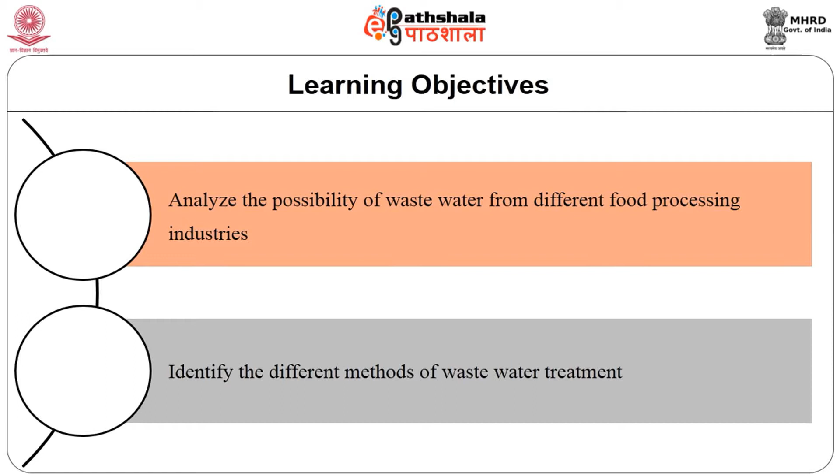Do you know the sources of wastewater? Let us see. Wastewater from food processing industry is different from other non-food industries in being readily degradable and free from toxicity.

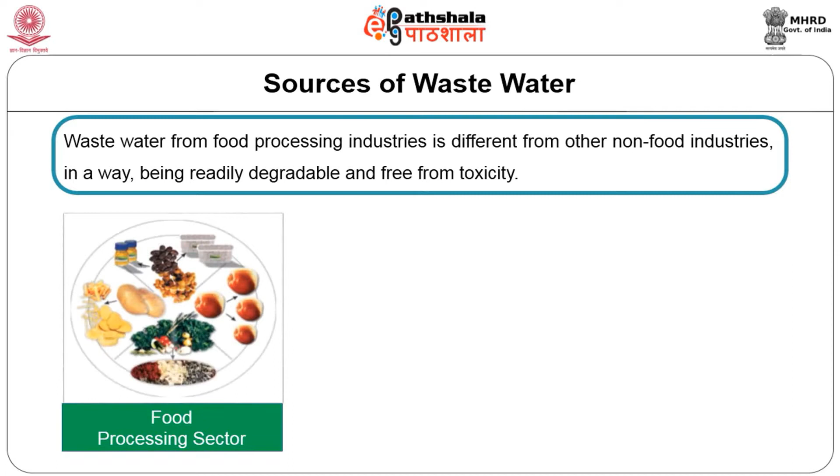Food processing sector can be classified into four major groups: fruit and vegetables, meat, poultry and seafood, beverage and bottling, and dairy operations. The sources of wastewater may be from meat and poultry processing, beverage industries, fruit and vegetable processing, dairy processing, fish processing, corn milling, fats and oils, sugar and flavor industry.

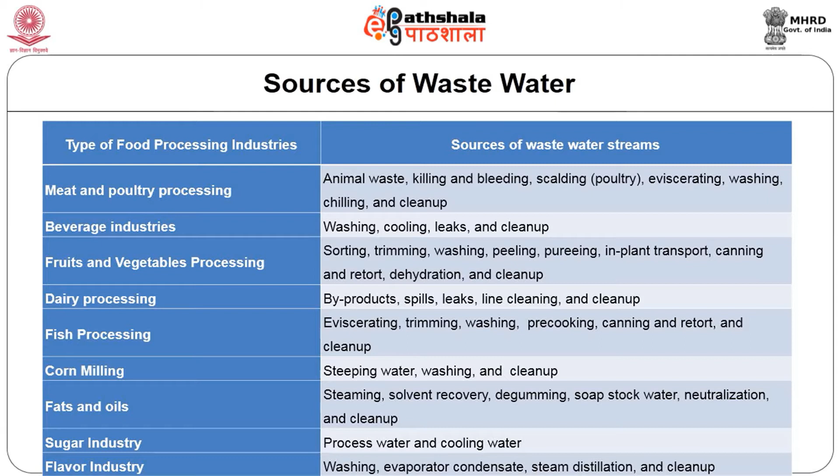The food processing wastewater shows a huge variation in BOD and COD level, total and suspended solids, oil, starch, sugar, color, preservatives, salts and minerals. This is due to the usage of different additives used for different food products.

Food industry wastewater constitutes COD, BOD and suspended solids of 11,220 mg per liter, 6,860 mg per liter and 2,210 mg per liter respectively. It is also reported that food industry wastewater is easily amenable to physicochemical treatment.

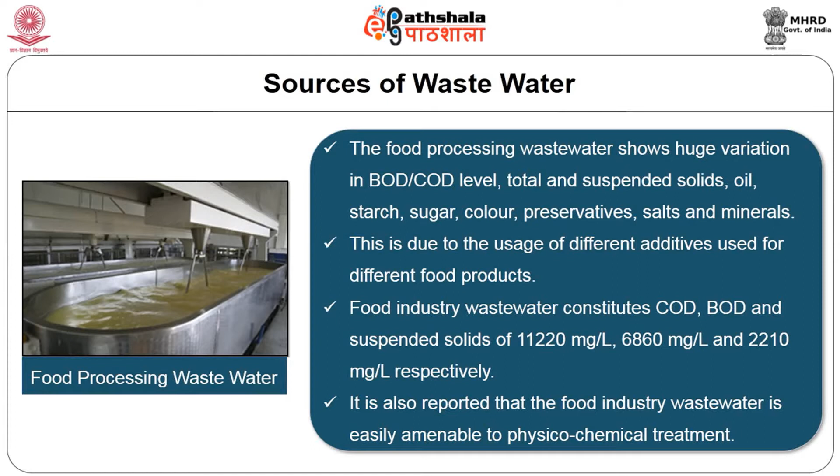The treatment methods can be used individually or in combination to remove moderate to high degree of chemical oxygen demand, biochemical oxygen demand, and suspended solids from the food processing wastewater.

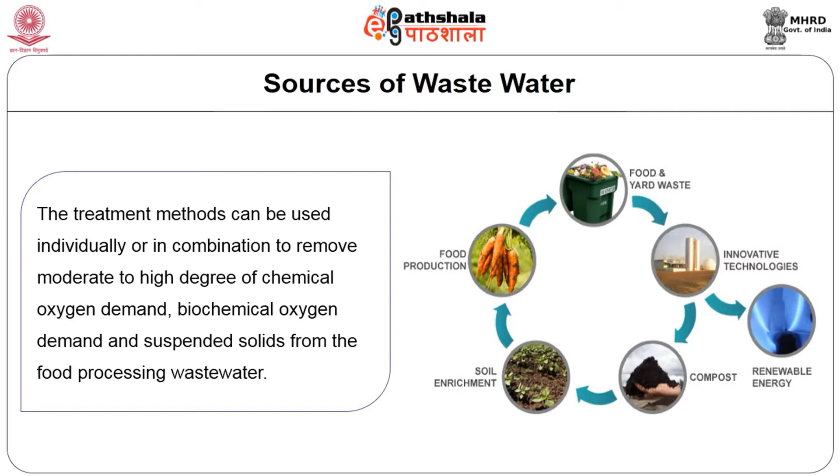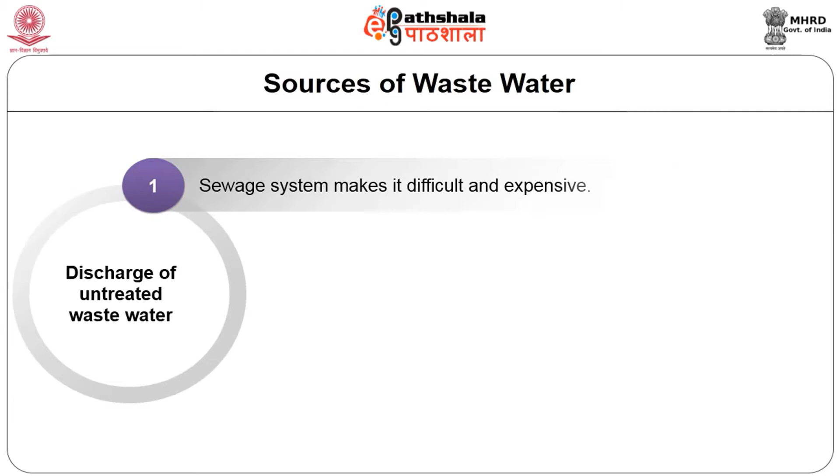Discharge of untreated wastewater into the sewage system makes it difficult and expensive. Similarly, discharging untreated water directly into the environment leads to numerous health hazards to humans, animals and marine organisms. Hence, the wastewater needs to be treated before discharging.

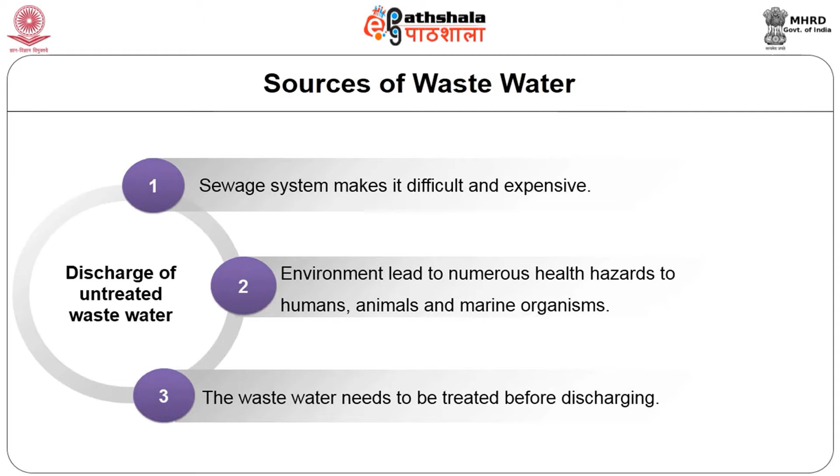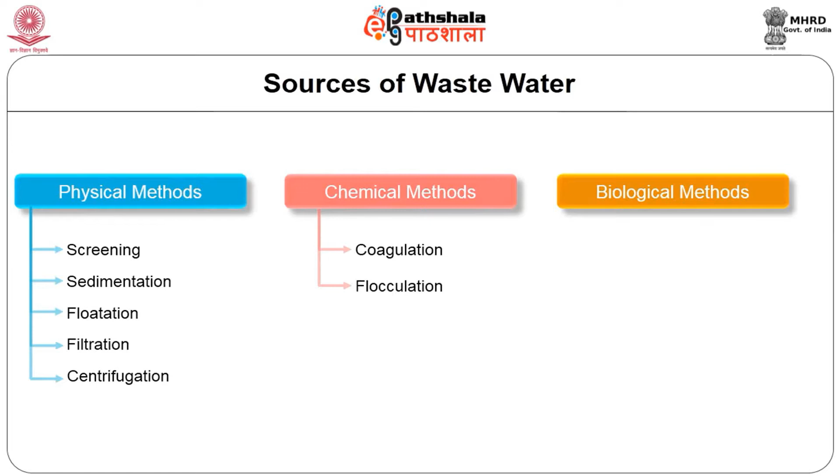The wastewater treatment methods are broadly classified into physical, chemical and biological methods. The physical methods include screening, sedimentation, flotation, filtration and centrifugation, whereas the chemical methods include coagulation and flocculation. First, we will discuss the physical methods of treatment, starting with screening.

Screening is the first process carried out in wastewater treatment. The presence of large solids would interfere with the next process or damage the equipment. A screen is a device with uniform size openings used to retain solids found in the wastewater entering the treatment plant. The screens may be of three different sizes: coarse screens, 6 to 150 mm; fine screen, 1.5 to 6 mm; and very fine screen, 0.2 to 1.5 mm.

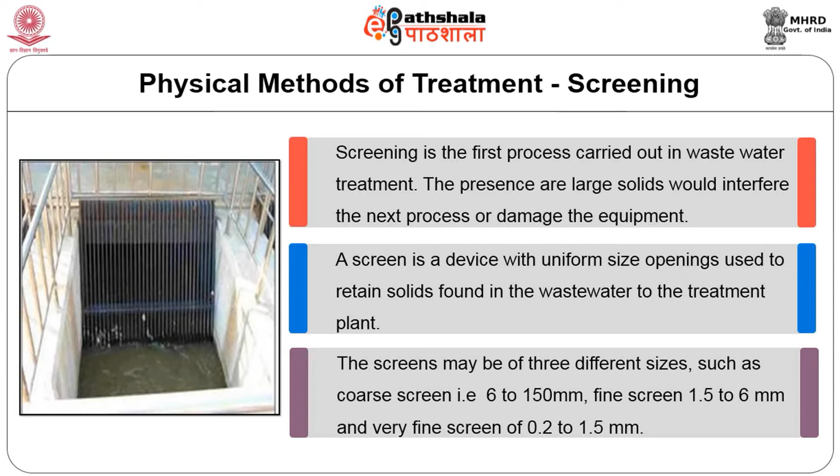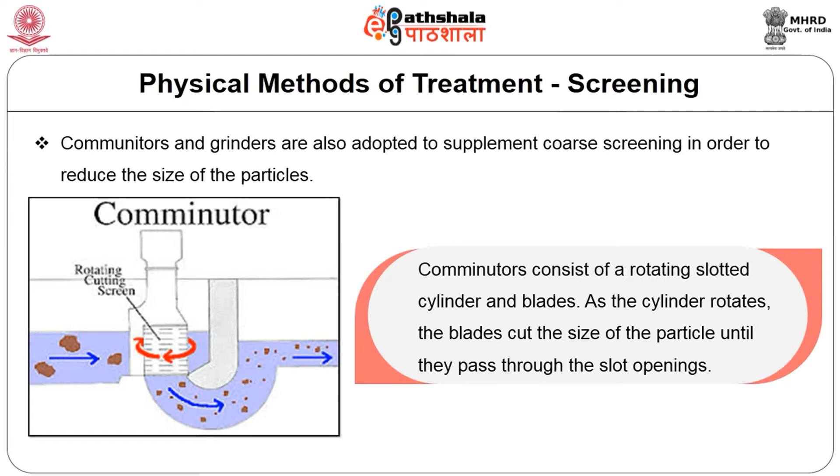Comminutors and grinders are also adopted to supplement coarse screening in order to reduce the size of particles. Comminutors consist of a rotating slotted cylinder and blades. As the cylinder rotates, the blade cuts the size of particles until they pass through the slot openings. Grinders consist of two sets of counter-rotating intermeshing cutters that trap and shear solids in the wastewater into a reliable particle size of 6 mm. The shafts counter-rotate at different speeds to clean the cutters.

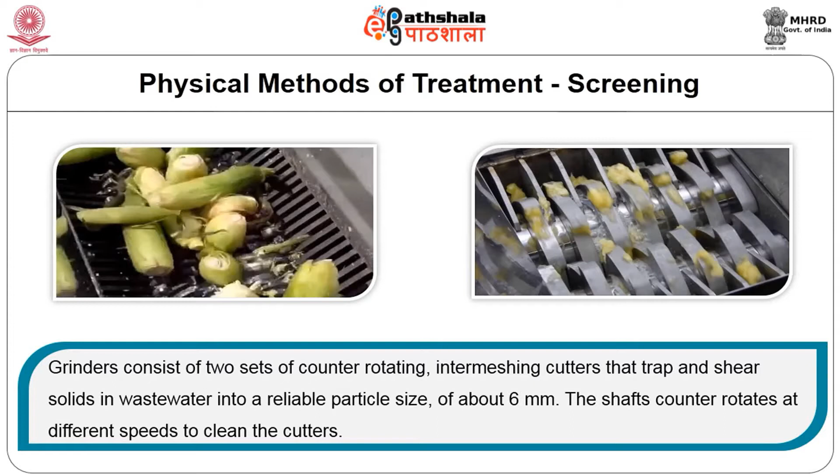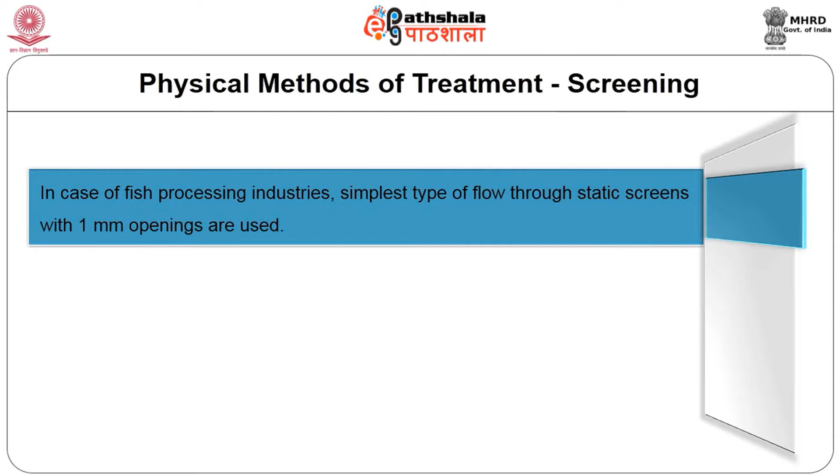In case of fish processing industry, the simplest type of flow-through static screens with 1 mm openings are used. The tangential type screens are static type but less prone to clogging during the flow of wastewater. Screening is used more frequently in small scale fish processing plants together with very simple settling tanks.

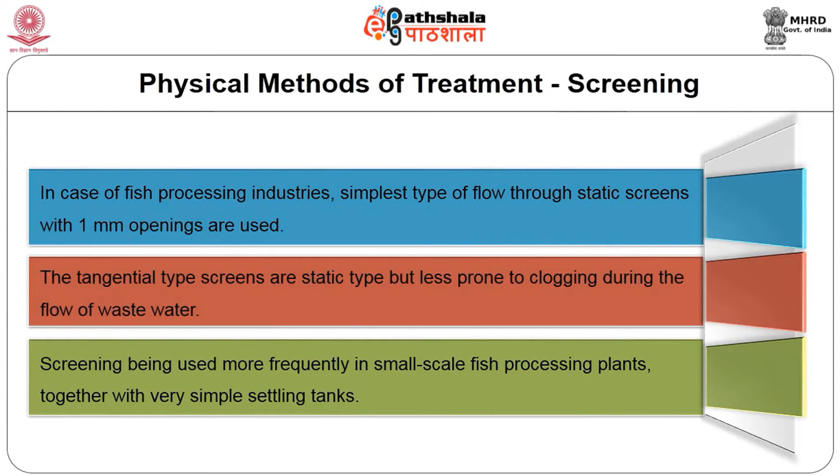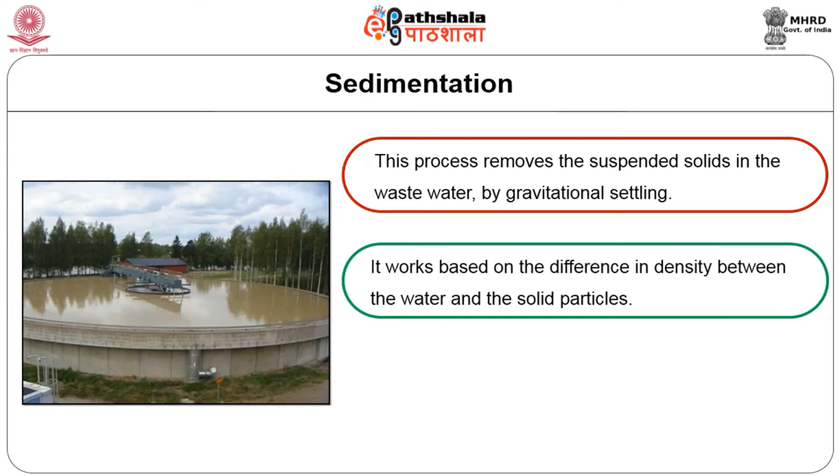The next method is sedimentation. This process removes suspended solids in the wastewater by gravitational settling. It works based on the difference in density between the water and the solid particles. The solid particles tend to settle at the bottom due to their higher density than water. Sometimes the terms sedimentation and settling are used interchangeably.

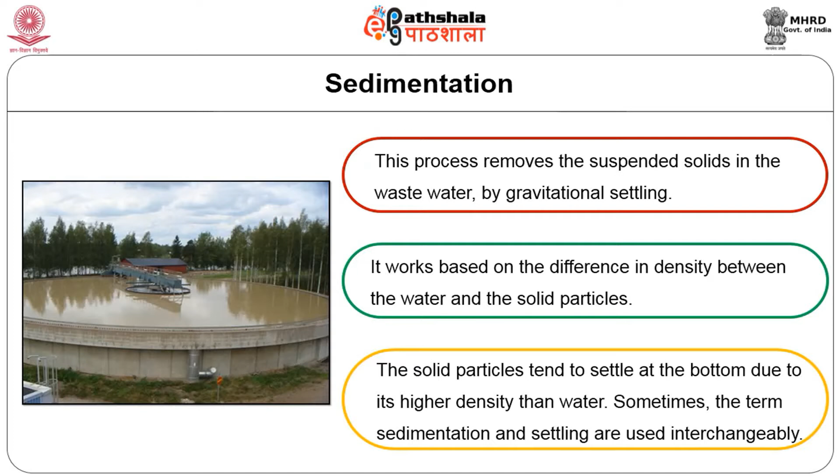Sedimentation process can be used as both primary and secondary treatment for separation of solids generated during biological treatment such as activated sludge or trickling filters. To carry out the gravitational settling, sedimentation basins are constructed in different sizes and shapes as required.

The basin consists of 4 zones: the inlet zone, settling zone, sludge zone and outlet zone. The incoming wastewater is distributed uniformly throughout the inlet zone to the tank. The heavier particles tend to settle in the settling zone and collect in the sludge zone at the bottom of the tank. The water without solids is collected in the outlet zone.

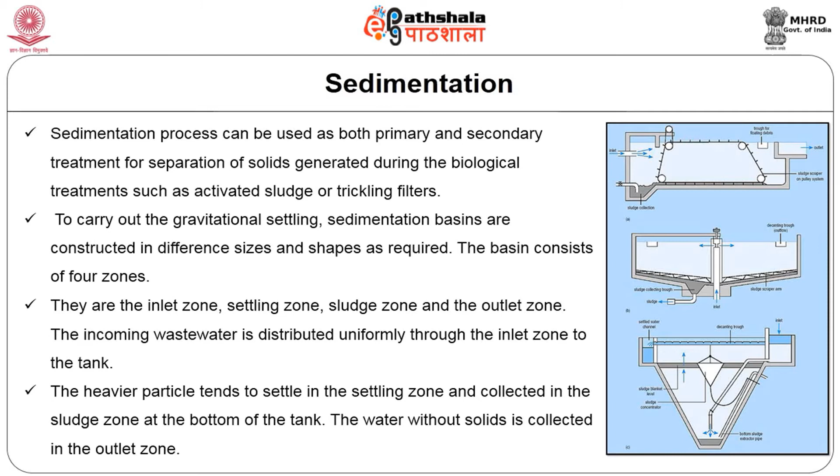Next topic is flotation. Flotation is a unit operation that removes suspended solids from the liquid phase. The most common method is air flotation, which may be further classified as dissolved air flotation and dispersed air flotation.

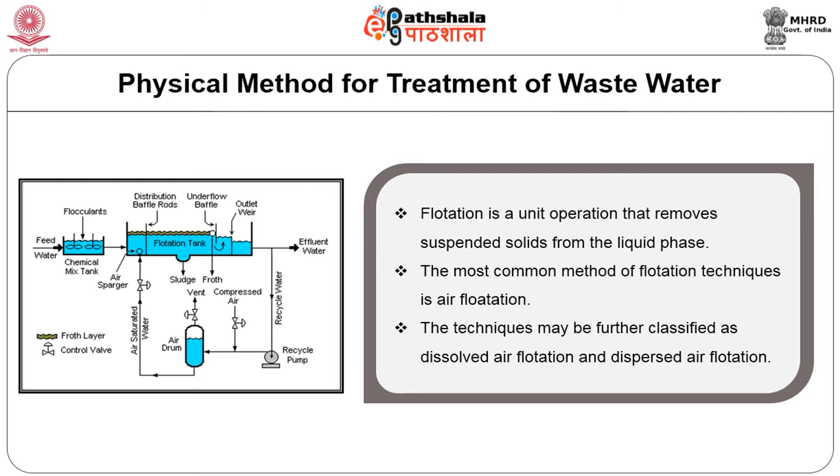In dissolved air flotation, the wastewater is initially pressurized with air in a closed tank. After passing through a pressure reduction valve, it enters the flotation tank, where due to sudden reduction in pressure, minute air bubbles of around 50 to 100 microns in diameter are produced. The bubbles attach to the suspended particles, and the buoyant force is great enough to rise to the surface, forming a scum layer.

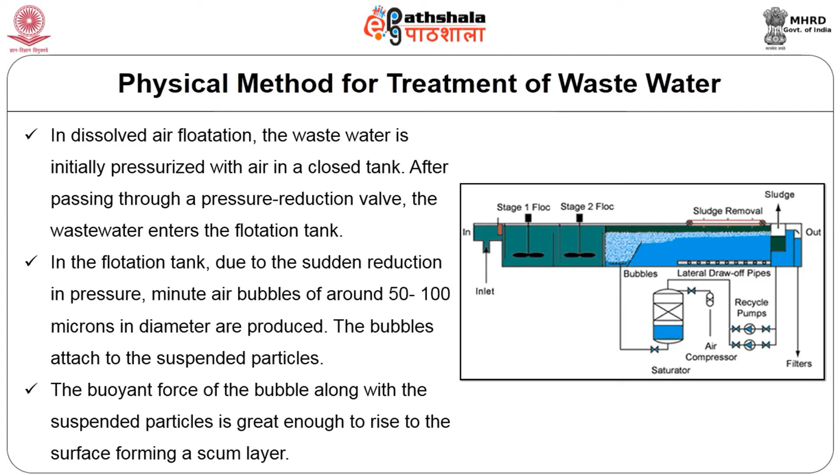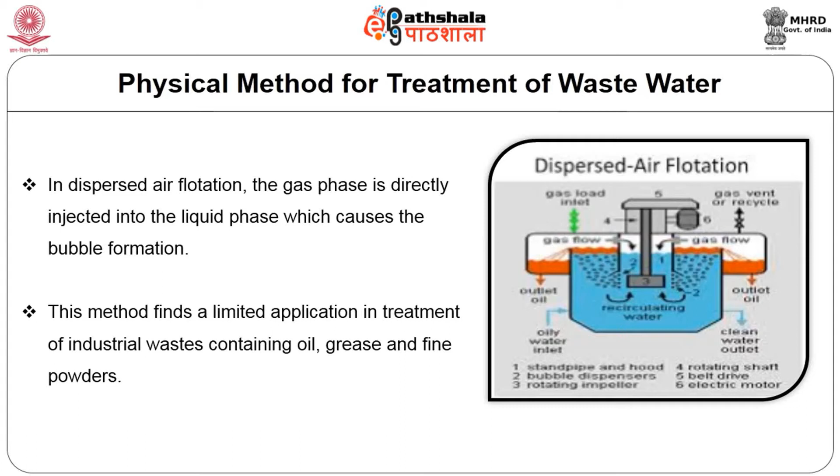In dispersed air flotation, the gas is directly injected into the liquid phase, causing bubble formation. This method finds limited application in treatment of industrial waste containing oil, grease and fine powders. The performance of these methods can be enhanced by addition of chemical additives.

The advantage of flotation over sedimentation is that very small and light particles that settle slowly can also be removed more completely in a shorter period. Flotation can also be used to concentrate sludge obtained from biological process.

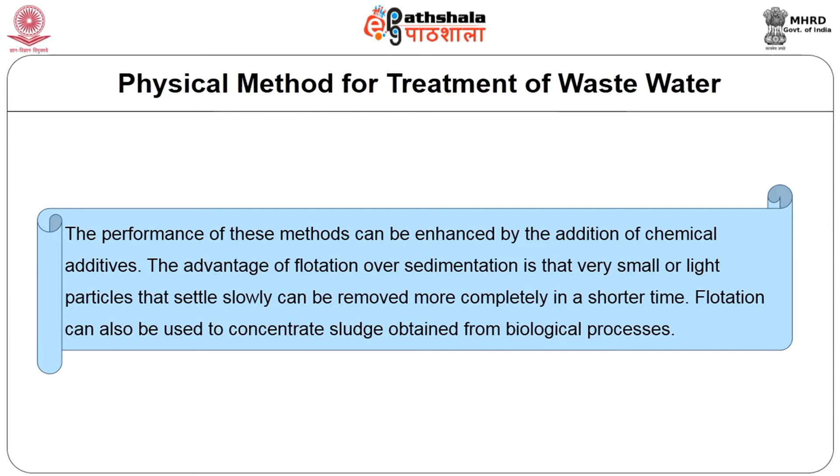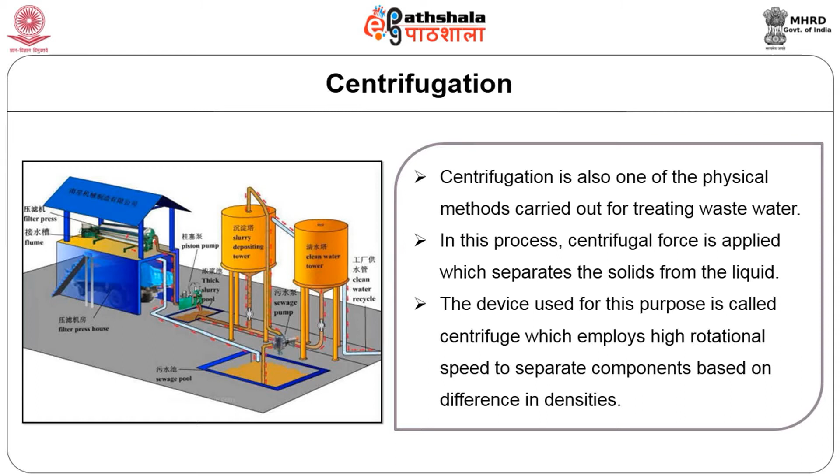The next method is centrifugation, one of the physical methods carried out for treating wastewater. In this process, centrifugal force is applied which separates the solids from the liquid. The device used is called a centrifuge, which employs high rotational speed to separate components based on difference in densities. A decanter centrifuge plays an important role in wastewater treatment, especially in food processing industries, separating solid material from liquids.

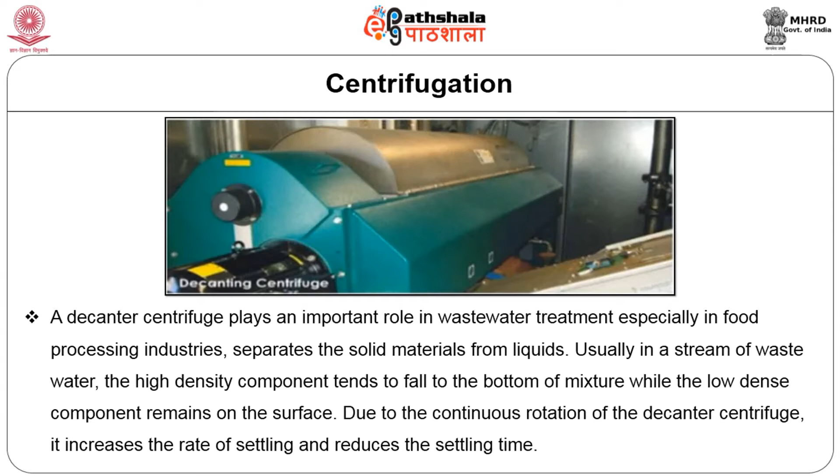Usually, in a stream of wastewater, the high density component tends to fall to the bottom of the mixture while the low dense component remains on the surface. Due to continuous rotation of the decanter centrifuge, it increases the rate of settling and reduces the settling time.

Another well-known method is filtration, often employed in wastewater treatment with or without pre-treatments by coagulation, flocculation and sedimentation, for removal of flocs or solids remaining in effluents from primary and secondary wastewater treatment. Use of rotary vacuum filters for dewatering is the most common method of filtration of sludge.

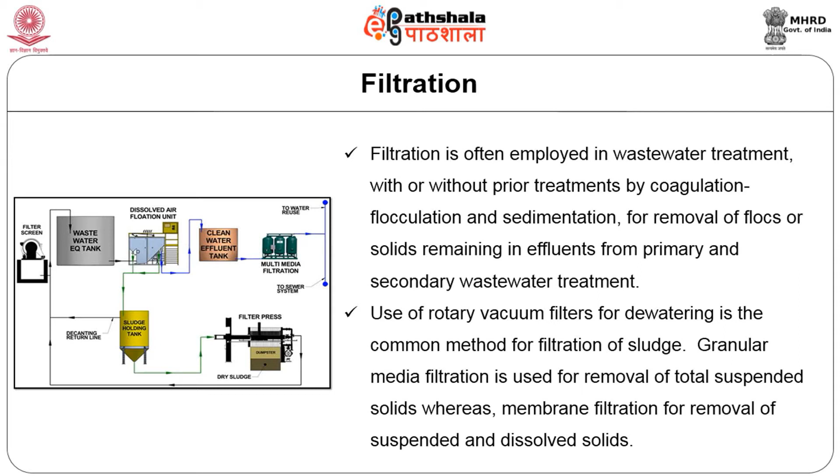Granular media filtration is used for removal of total suspended solids, whereas membrane filtration is used for removal of suspended and dissolved solids.

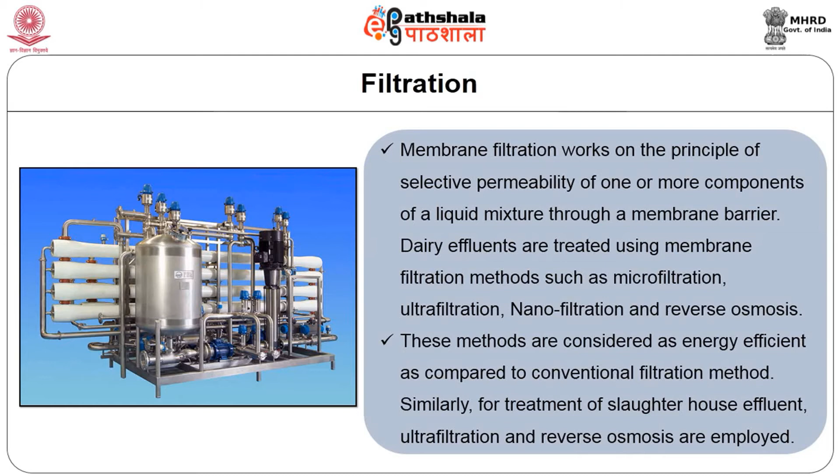Membrane filtration works on the principle of selective permeability of one or more components of a liquid mixture through a membrane barrier. Dairy effluents are treated using membrane filtration methods such as microfiltration, ultrafiltration, nanofiltration and reverse osmosis. These methods are considered energy efficient compared to conventional filtration methods. Similarly, for treatment of slaughterhouse effluent, ultrafiltration and reverse osmosis are employed.

Next, we'll move on to chemical methods. Chemical methods of wastewater treatment involve chemicals which will react with a portion of the undesired materials. But the use of chemical additives creates difficulty in discharging huge amounts of treated chemicals.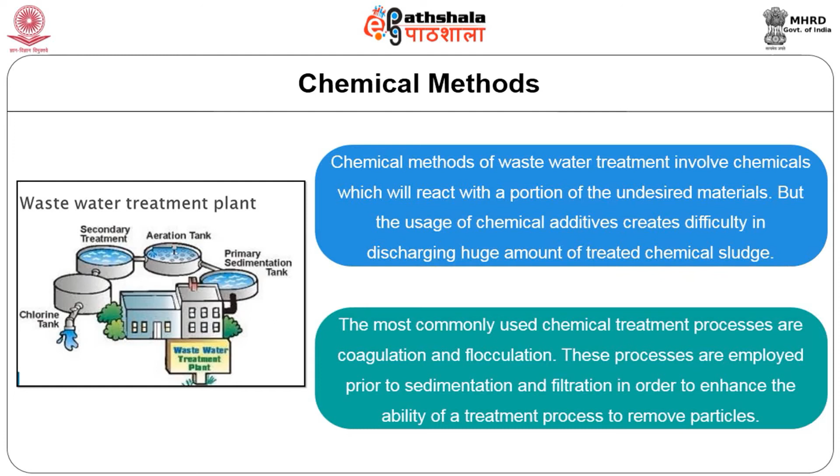The most commonly used chemical treatment processes are coagulation and flocculation. These processes are employed prior to sedimentation and filtration in order to enhance the ability of a treatment process to remove particles. So the next method is coagulation.

Coagulation is a process by which colloidal particles are destabilized. Destabilization can be achieved through the addition of coagulants. It neutralizes the charges of wastewater and forms a gelatinous mass to trap particles, thus forming a mass large enough to settle or to be trapped in the filter.

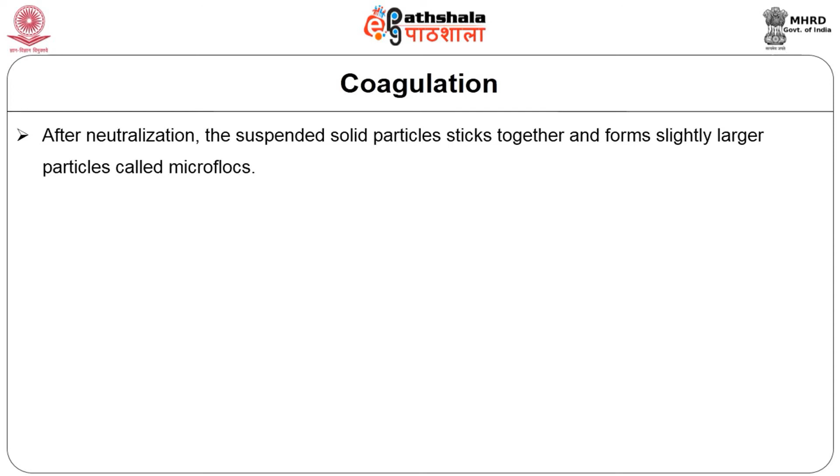Coagulants with opposite charges to those of the suspended solids are added to the water to neutralize the negative charge on dispersed non-settlable solids such as organic substances. After neutralization, the suspended solid particles stick together and form slightly larger particles called microflocs.

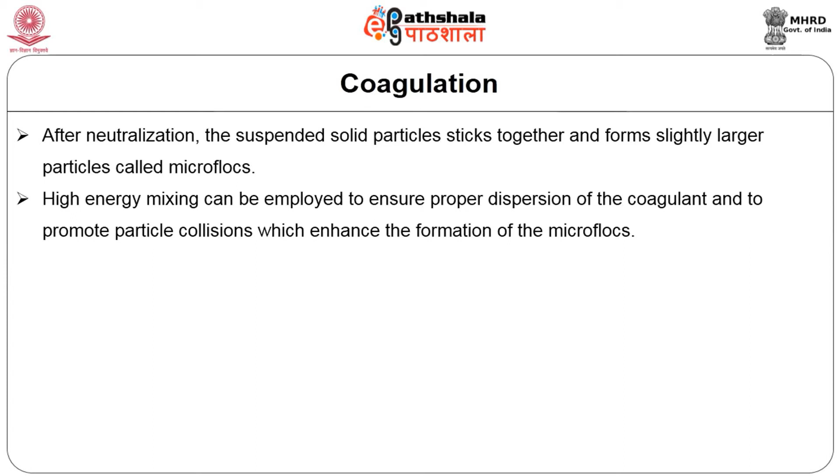High energy mixing can be employed to ensure proper dispersion of the coagulant and to promote particle collision, which enhances the formation of microflocs. The formed microflocs are then removed using the sedimentation process.

The most widely used coagulants for wastewater treatment are aluminum sulfate, ferrous sulfate, ferric sulfate, and ferric chloride. Chitosan is a natural coagulant used to treat wastewater from milk processing plants.

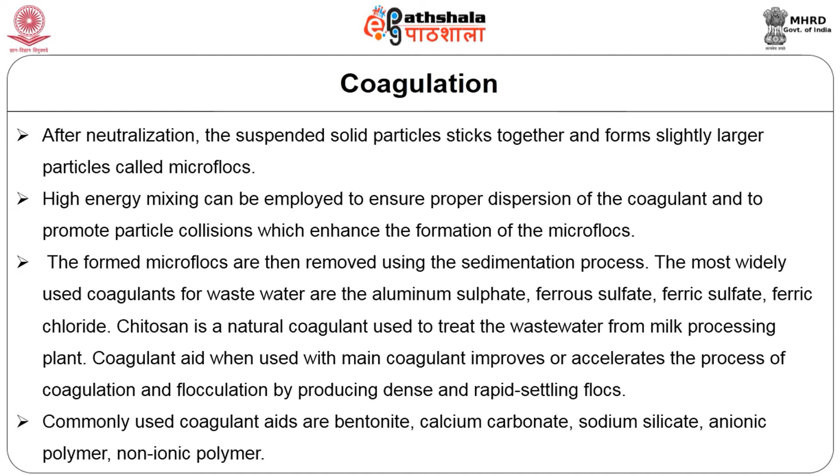Coagulant aid, when used with the main coagulant, improves or accelerates the process of coagulation and flocculation by producing a dense and rapid settling flocs. Commonly used coagulant aids are bentonite, calcium carbonate, sodium silicate, anionic polymer and non-ionic polymer.

The next method is flocculation, a mixing or agitation process which encourages particles to agglomerate into masses large enough to be settled or to be filtered from solution.

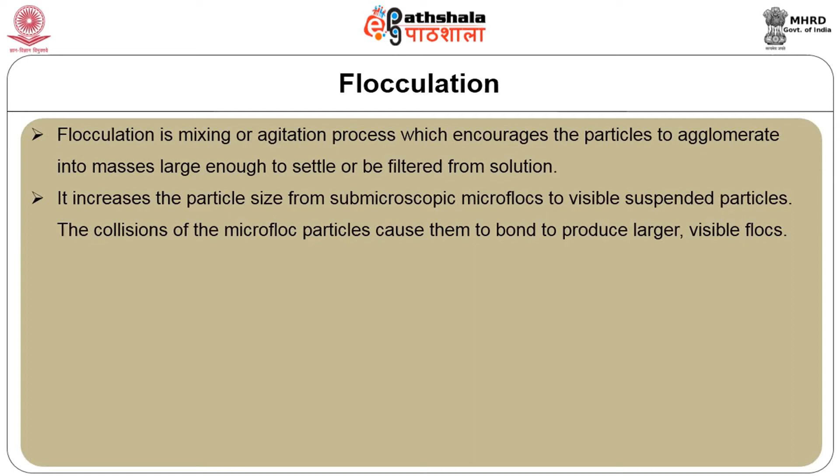It increases the particle size from submicroscopic microflocs to visible suspended particles. The collision of the microfloc particles causes them to bond to produce larger visible flocs. Due to additional collision and interaction with inorganic polymers formed by the coagulant, the floc size continues to increase. Commonly used flocculants are iron, aluminium, magnesium and calcium.

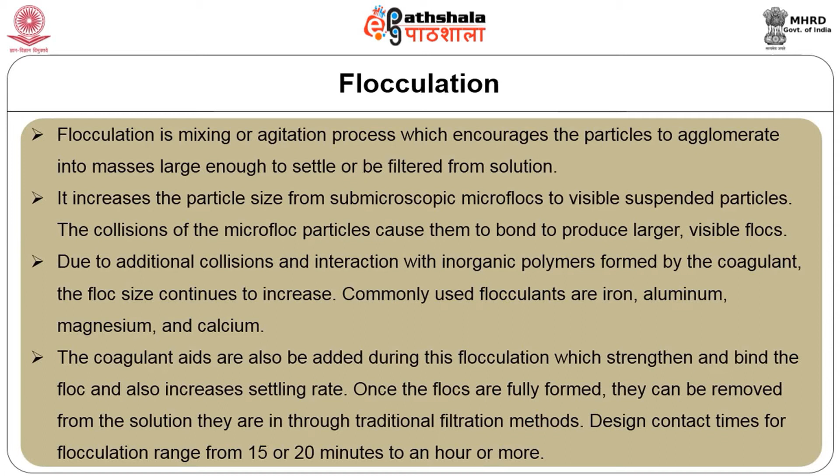Coagulant aids are also added during flocculation, which strengthen and bind the floc and increase the settling rate. Once the flocs are fully formed, they can be removed from the solution through traditional filtration methods. Design contact time for flocculation ranges from 15 or 20 minutes to an hour or more.

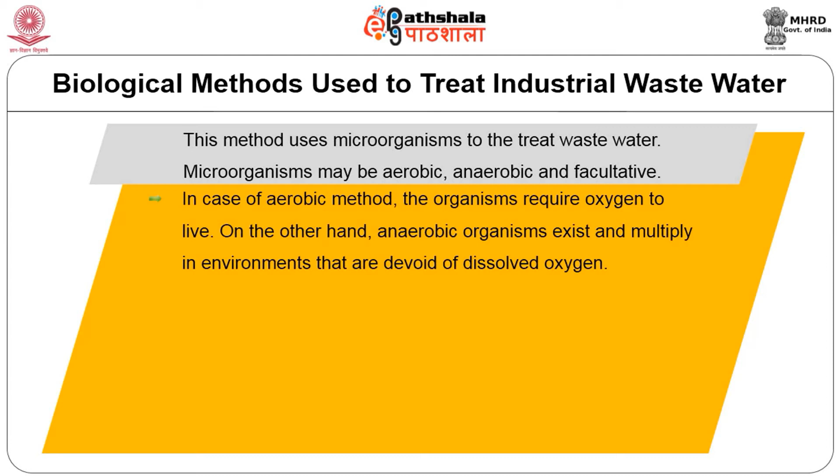The next method is the biological method. This method uses microorganisms to treat wastewater. Microorganisms may be aerobic, anaerobic, and facultative. In the aerobic method, organisms require oxygen to live. Anaerobic organisms, on the other hand, exist and multiply in environments devoid of dissolved oxygen. Facultative bacteria can switch to aerobic or anaerobic growth depending on the environment.

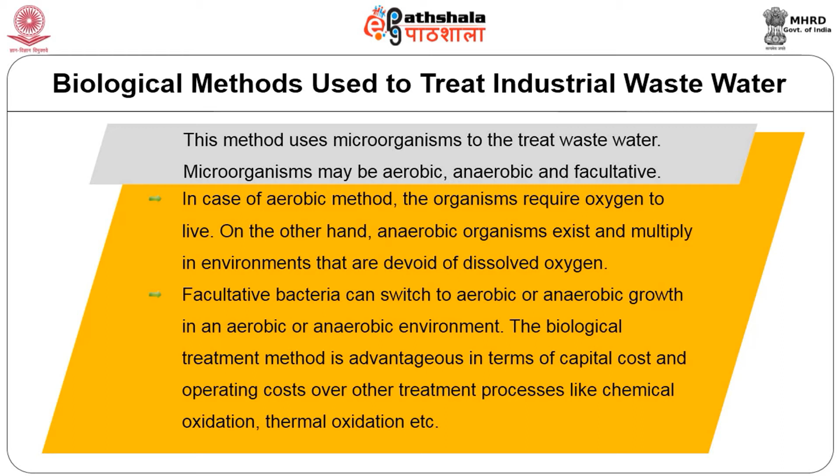The biological treatment method is advantageous in terms of capital cost and operating cost over other traditional treatments like chemical oxidation and thermal oxidation.

Aerobic treatment of wastewater utilizes free or dissolved oxygen by microorganisms to degrade organic waste. The aeration process acts as an oxygen source for the growth of aerobic microorganisms, which treat the organic matter and form sludge as a byproduct. Oxygen supply to the aerobes acts as an electron acceptor, significantly accelerating the biodegradation process and increasing the throughput capacity of the treatment system. Common methods of aerobic treatment include activated sludge, aerated lagoons, trickling filters, and rotating biological contactors.

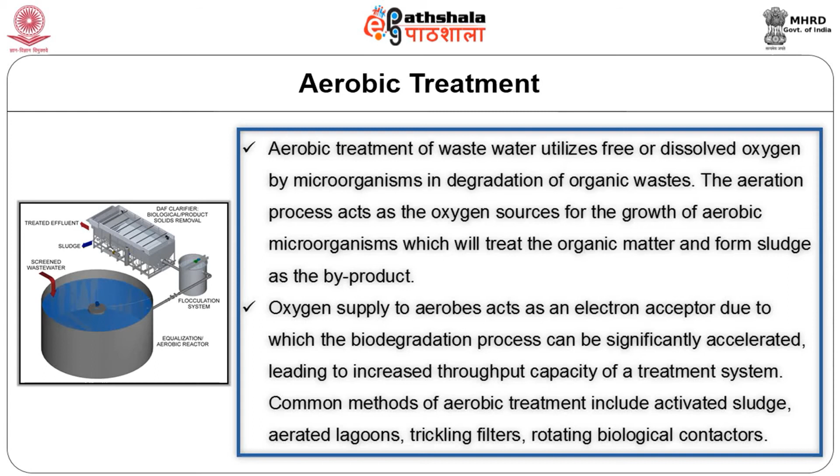Activated sludge is one such aerobic treatment method, containing an aeration tank and a sedimentation tank. This method utilizes aerobic microorganisms suspended in the wastewater in the aeration tank. Part of the organic component is completely oxidized, while other inorganic substances provide energy to sustain microbial growth and biomass formation. The flocs are kept in suspension by air blown into the bottom of the tank or by mechanical aeration.

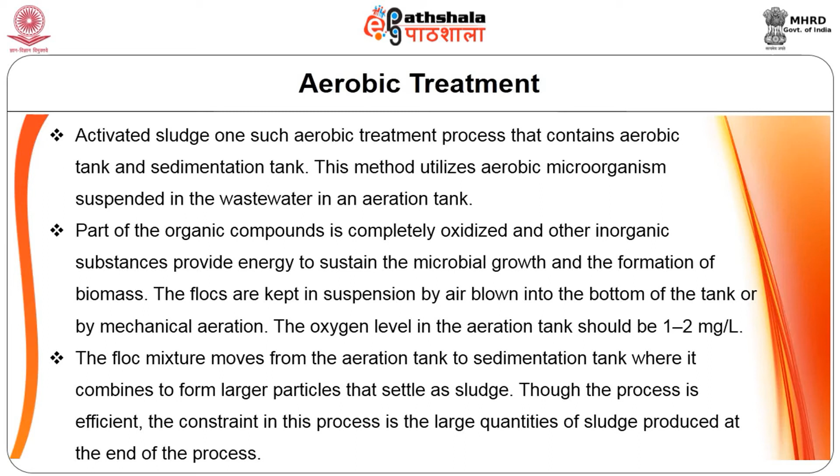The oxygen level in the aeration tank should be 1 to 2 mg per liter. The floc mixture moves from the aeration tank to the sedimentation tank, where it combines to form larger particles that settle as sludge. Though the process is efficient, the constraint is the large quantity of sludge produced at the end of treatment.

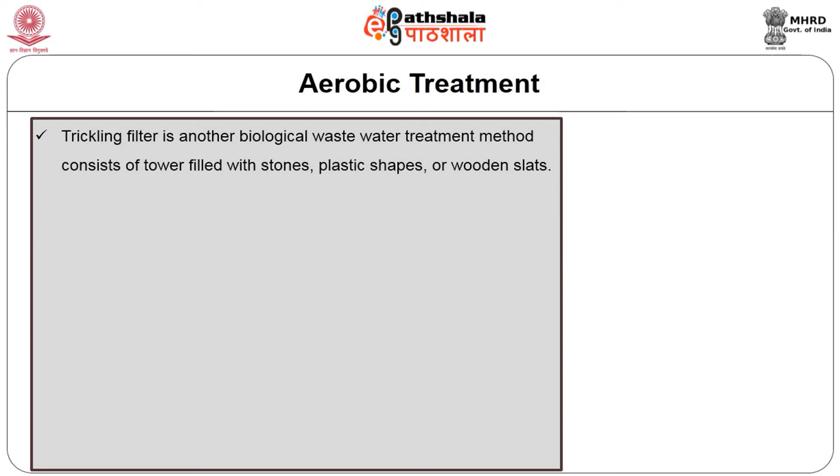Trickling filter is another biological wastewater treatment method, consisting of a tower filled with stones, plastic shapes, or wooden slats. Wastewater is applied either intermittently or continuously over the support media. The microbes attach to the media and form a biological film. Oxygen is supplied to the biological film either up or down through the media based on the temperature of ambient air and the wastewater, and air can also be forced into the media.

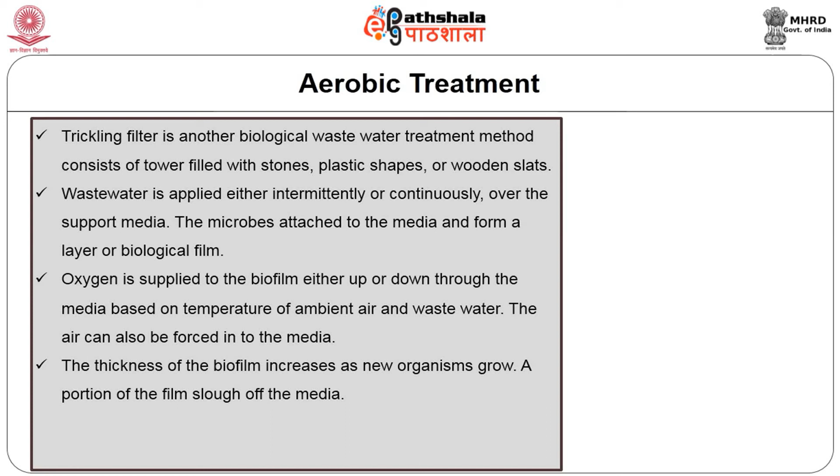The thickness of the biofilm increases as new organisms grow, and a portion of the film sloughs off the media. The sloughed material is separated from the liquid in a secondary clarifier and discharged to sludge processing.

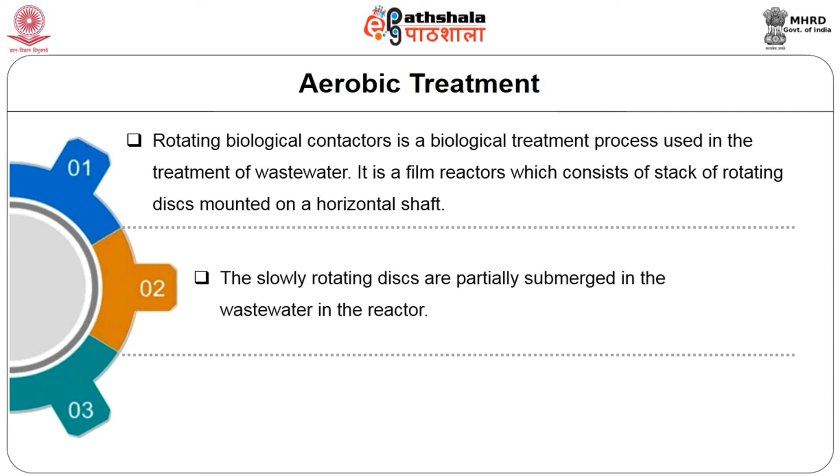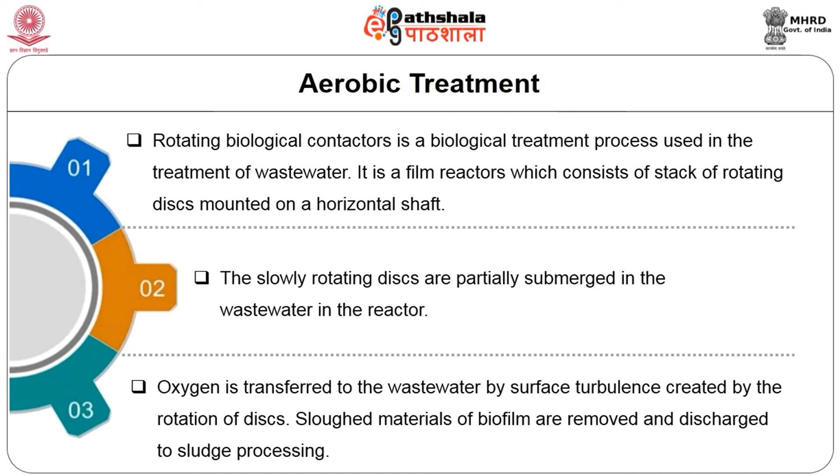Rotating biological contactors are a biological treatment process used in wastewater treatment. It is a film reactor consisting of a stack of rotating discs mounted on a horizontal shaft. The slowly rotating discs are partially submerged in the wastewater in the reactor. Oxygen is transferred to the wastewater by surface turbulence created by the rotation of the discs. The sloughed materials of biofilm are removed and discharged to sludge processing.

The next method is the anaerobic treatment method. Anaerobic wastewater treatment consumes less energy and space, and produces less sludge compared to the aerobic method. This method utilizes microorganisms to degrade biodegradable material in the absence of oxygen.

Complex organic materials are hydrolyzed into simplified organics by hydrolytic enzymes. The simplified organics are then fermented into organic acids and hydrogen by fermenting bacteria. The volatile organic acids are later converted into acetate and hydrogen by acetogenic bacteria. Then methanogens use the hydrogen and acetic acid and transform them into methane. Microorganisms used in the methane producing process are Methanobacterium, Methanobacillus, and Methanococcus.

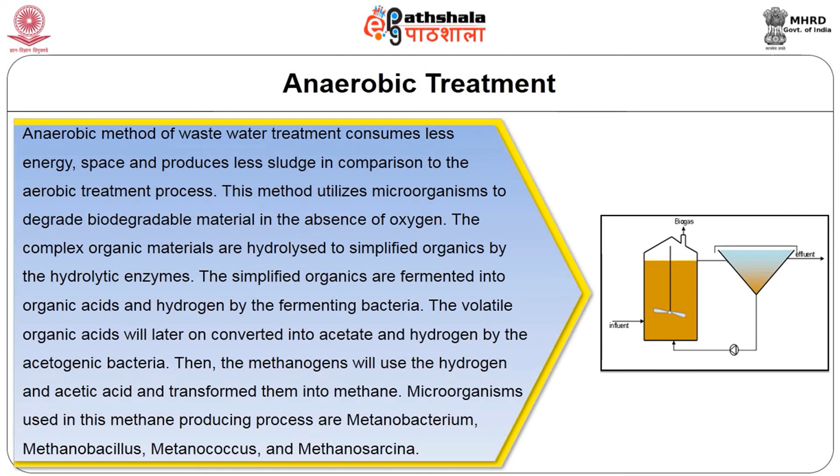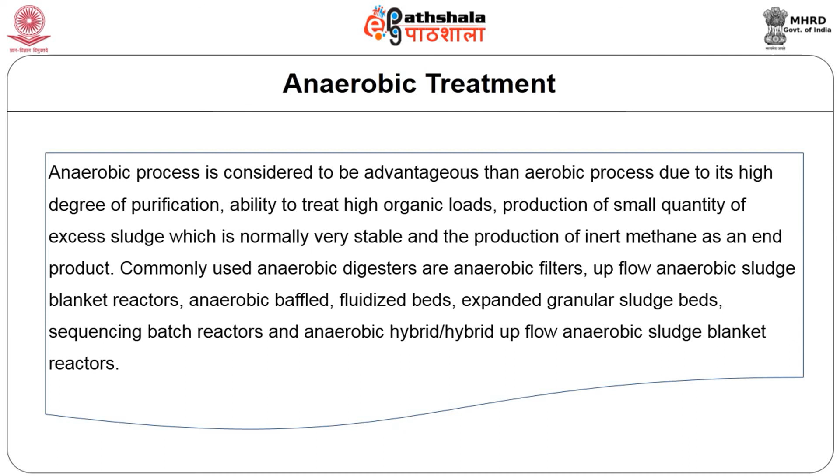Anaerobic process is considered advantageous over aerobic process due to its high degree of purification, ability to treat high organic loads, production of small quantities of excess sludge that is normally very stable, and production of inert methane as an end product. Commonly used anaerobic digesters include anaerobic filters, upflow anaerobic sludge blanket reactors, anaerobic baffled fluidized beds, expanded granular sludge beds, sequencing batch reactors, and anaerobic hybrid upflow anaerobic sludge blanket reactors.

Let me summarize the points discussed so far. Wastewater from the food industry contains a huge quantity of total and suspended solids, oil, starch, sugar, color, preservatives, salts, and minerals. The discharge of untreated wastewater into the sewage system makes treatment very difficult and expensive.

The process of sedimentation removes suspended solids in wastewater by gravitational settling. The most common method of flotation technique is air flotation, and the centrifugation process of wastewater treatment employs high rotational speed to separate components based on differences in densities.

Coagulation process neutralizes the charges of wastewater and forms a gelatinous mass to trap particles, forming a mass large enough to settle or be trapped in the filter. Flocculation is a mixing or agitation process which encourages particles to agglomerate into masses large enough to settle or be filtered from solution. The biological method of wastewater treatment uses microorganisms to treat the wastewater.